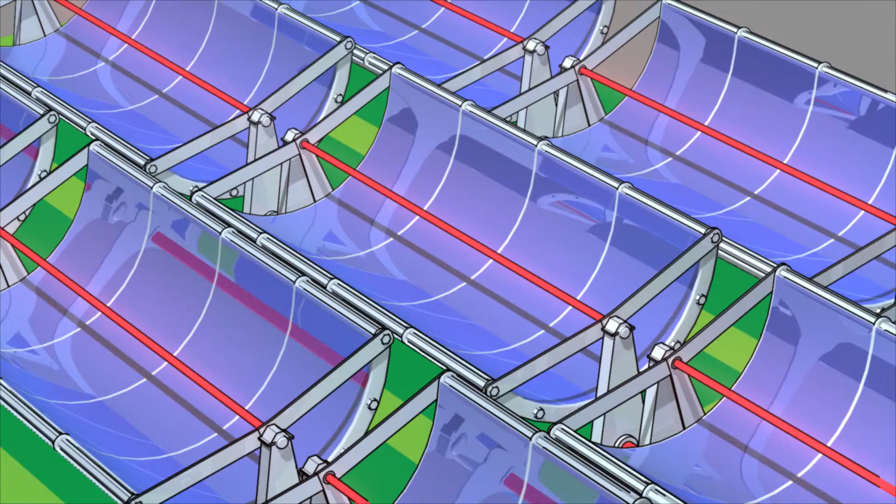Solar cells absorb sunlight and then transfer the absorbed energy to valence electrons. Energized excess valence electrons from negative layers then travel to electron-deficient positive layers, thereby producing electricity. Solar heat can be utilized to produce electricity in a practice known as concentrated solar power. Concentrated solar power systems have specially designed mirrors which focus the sun rays to generate intense heat.

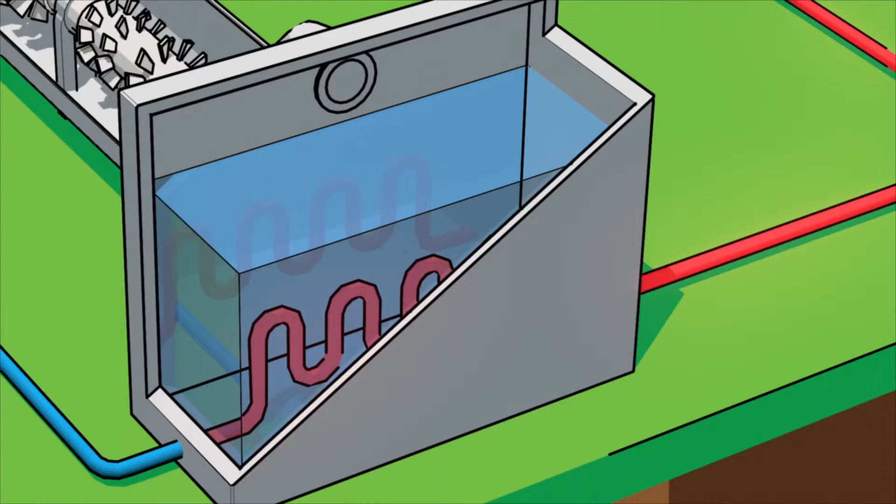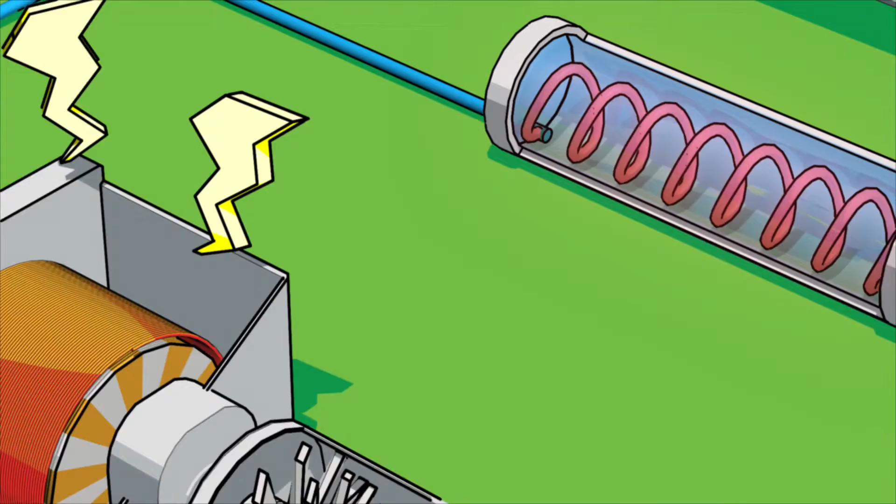Heat-storing fluids transfer the heat to either a steam turbine or mechanical device that drives an electric generator to produce electricity. Thermal storage systems store the heat generated when the sun is shining, allowing it to be used when the sun has set or is blocked by clouds. A variety of research on solar energy is being done. For example, nanotechnology is being applied in investigations of different types of solar cells.

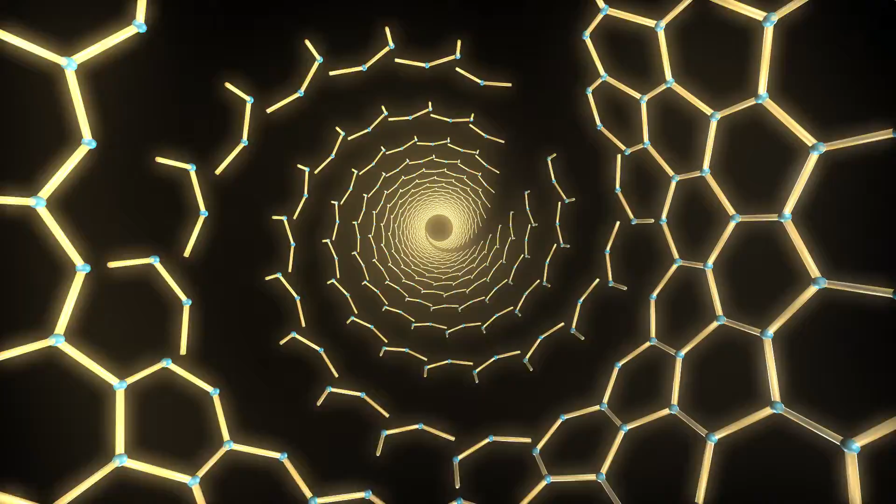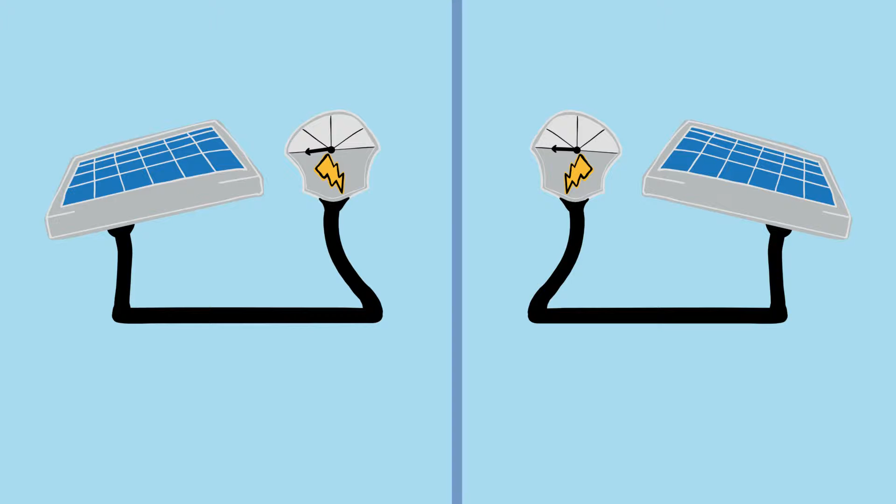Nanotechnology is a relatively new discipline involving the study of molecular structures on the order of nanometers in size. A nanometer is a unit of length equal to 1/1,000,000,000th of a meter. Due to their size and shape, such structures can possess unique properties. For example, nanometer-scaled molecular structures comprising solar cells can potentially absorb a greater amount of light across a wider wavelength and more efficiently convert it into electricity than can conventional solar cells.

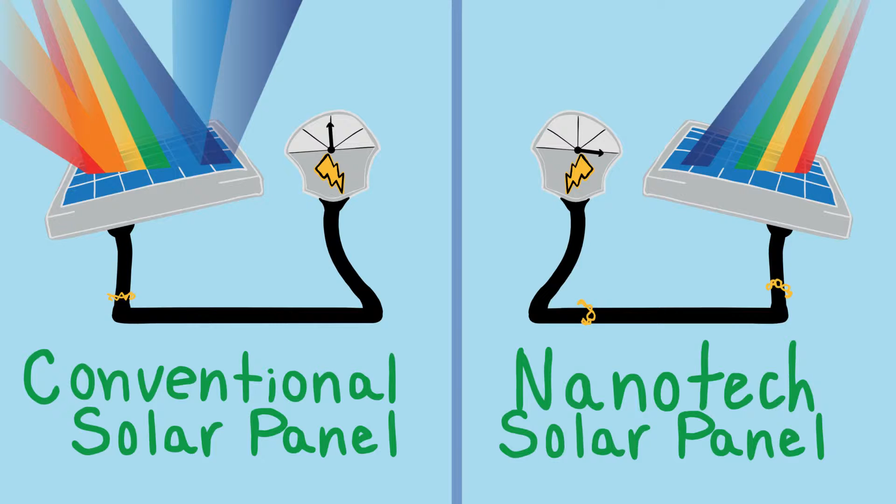A novel area of research involves using solar energy to recycle carbon dioxide by converting it into fuels. Photocatalysts are being investigated for this purpose. Catalysts are substances which speed up the rate of a chemical reaction without being consumed in that reaction. Research is being done to develop photocatalysts which facilitate conversion of carbon dioxide to various low molecular weight hydrocarbons, with sun energy driving the reaction.

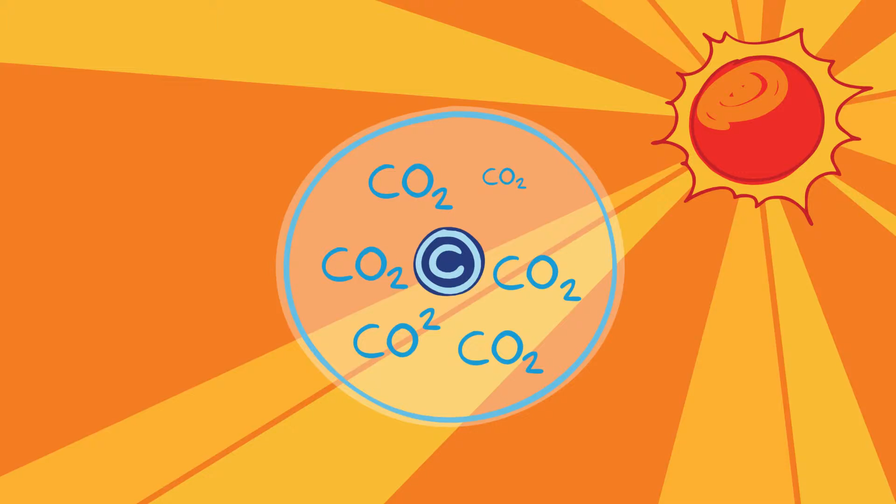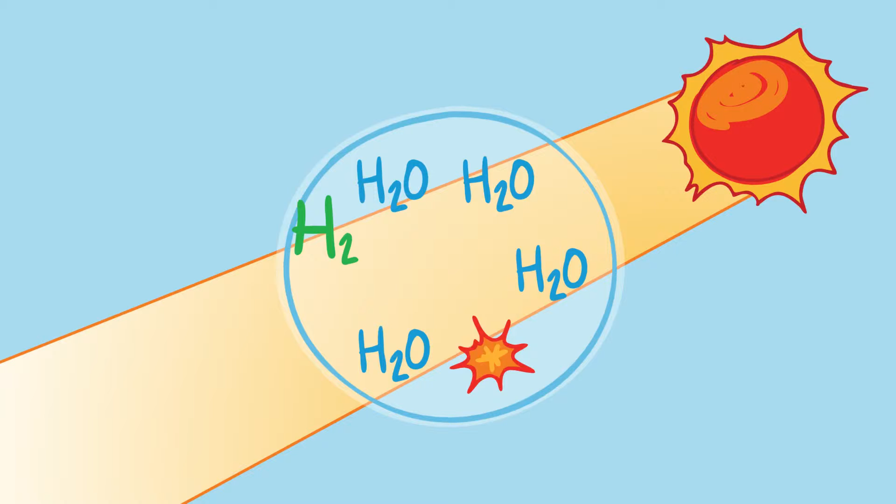Additionally, concentrated solar power technology is being developed to convert carbon dioxide to carbon monoxide and break down water to produce hydrogen. These reaction products can serve as starting materials for producing various fuels. Some of them, such as low molecular weight hydrocarbons and hydrogen, can be used directly as fuel.

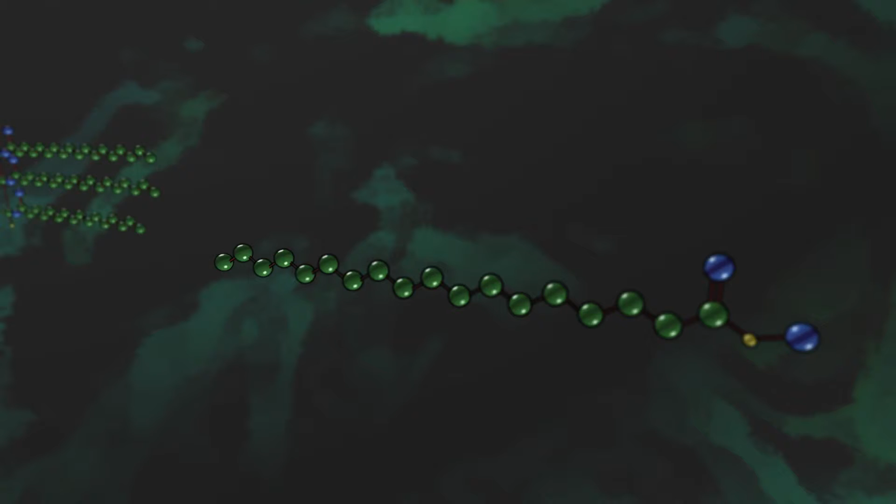Bioenergy is energy derived from organic material obtained from renewable natural sources known as biomass. Biomass includes agricultural and forestry residues, municipal solid waste, industrial waste, animal waste, and crops grown specifically for energy conversion. Biomass can be used as feedstock in producing a range of fuels known as biofuels. Various chemical and biochemical processes convert biomass to biofuels.

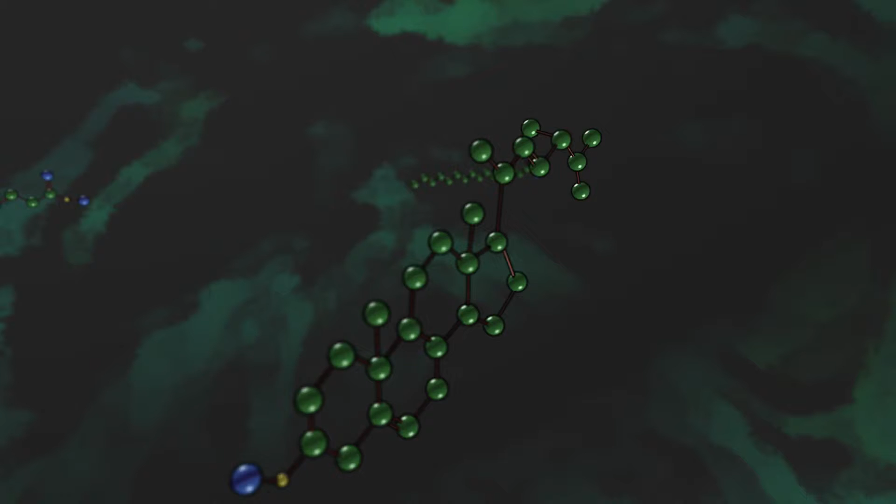For example, a series of catalyzed chemical reactions are used to deoxygenate, break down, rearrange, and isomerize lipids from algae to produce a complex mixture of branched and cyclic alkanes and aromatic hydrocarbons, which comprise jet fuel. Lipids are a class of water-insoluble natural compounds which serve various purposes in organisms, such as energy storage and as a component of cell membranes. Algae are particularly well suited as a lipid source due to their high lipid content and high growth rates.

Much progress has been made in developing biofuels. In the case of biomass-derived jet fuel, performance characteristics superior or equal to that of conventional jet fuel have been achieved. In the United States and other countries, several successful test flights of commercial and military aircraft powered by biomass-derived jet fuel have been completed.

Bioenergy research and development efforts are aimed at investigating new and further developing existing bioenergy technologies, reducing their cost and putting them into practice.

A tremendous amount of renewable energy is present in the oceans. Types of ocean energy include wave energy, tidal energy, ocean current energy, ocean thermal energy conversion, and salinity gradient energy.

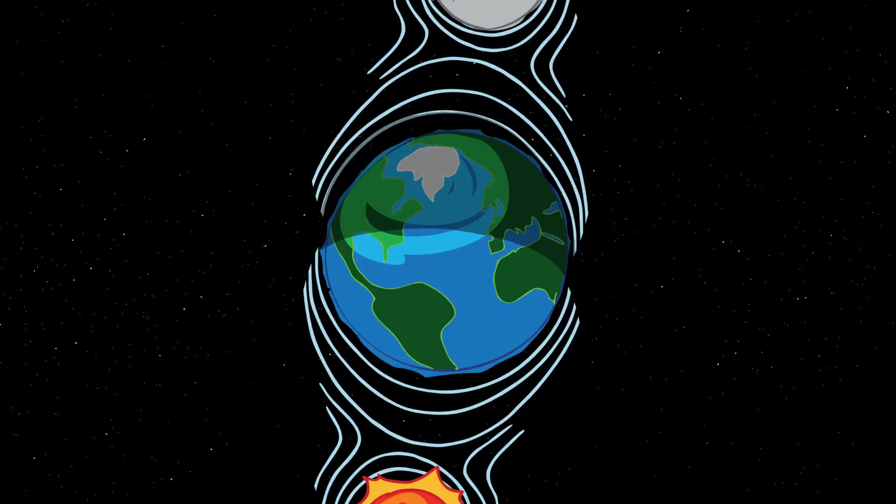Tides are produced mainly by the gravitational pull of the moon and sun. Rising and falling tides produce tidal currents which are bidirectional and reverse direction four times daily. Tides sufficiently strong for energy production occur in many places all over the world, with the highest tides in the world occurring between Nova Scotia and the state of Maine, and near Alaska.

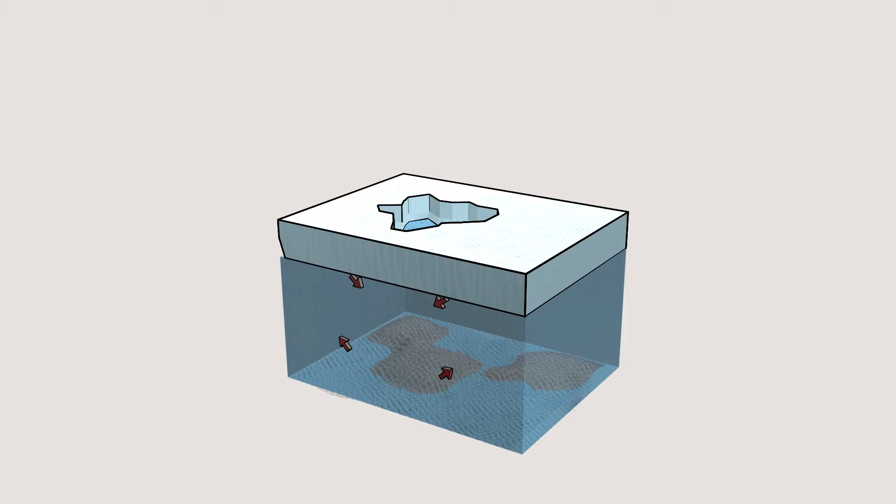When ocean water freezes in polar regions, salt is left behind in the surrounding water, causing it to become more dense and therefore to sink. Surrounding surface water then comes in to replace it, and the cycle continues. This process, as well as the action of wind, forms the basis of ocean currents.

Ocean currents move continuously in one direction and at a relatively constant rate in fixed paths, traversing oceans all over the globe. In the area of the United States, the Gulf Stream is an ocean current and travels through the Gulf of Mexico, around the tip of Florida, and up the East Coast.

Many different types of wave and tidal energy devices are in use or being developed. Some are used underwater, some at the water surface. These devices employ various different techniques to harness the kinetic and potential energy inherent in the water. Places where this type of work is being done include Nova Scotia, France, Scotland, England, China, South Korea, Portugal, Australia, Russia, and the United States.

At present, there are no commercial ocean current energy facilities in operation. However, various techniques to harness ocean current energy are being investigated.

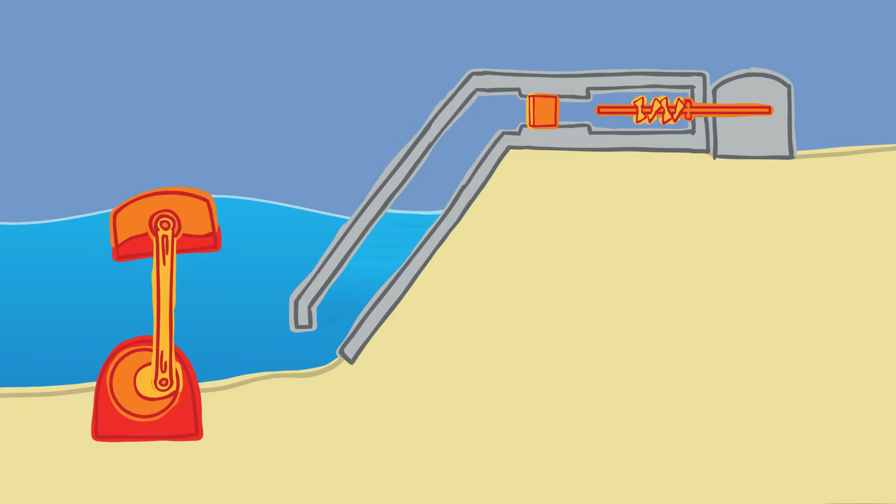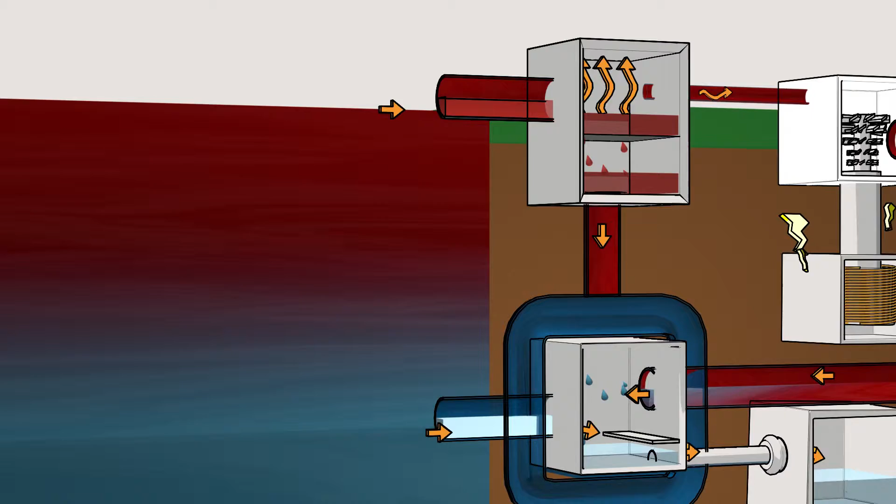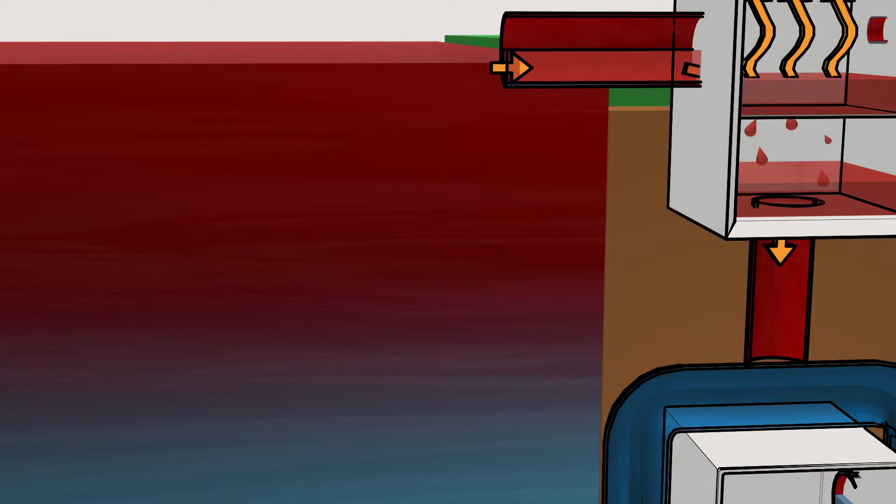Ocean thermal energy conversion, also known as OTEC, takes advantage of the temperature difference between colder, deep ocean water and warmer surface water in tropical coastal regions. One type of OTEC system employs a process whereby warm surface water subjected to a low-pressure environment is converted to steam. The steam drives a turbine connected to an electrical generator to produce electricity, and cold water pumped from the deep condenses the steam.

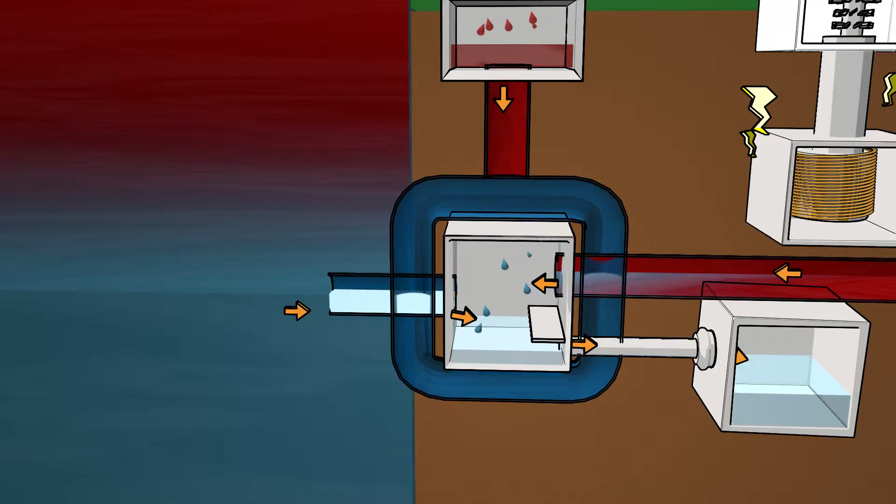Current research on OTEC is aimed at improving the technology and reducing cost.

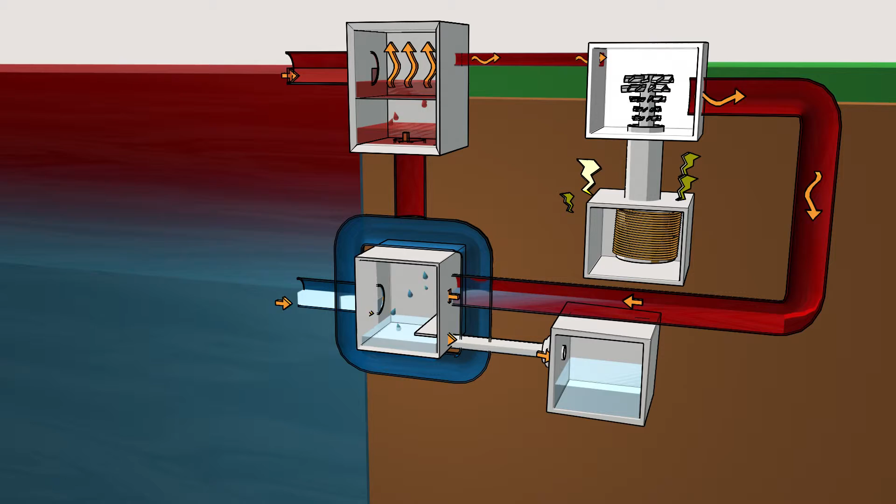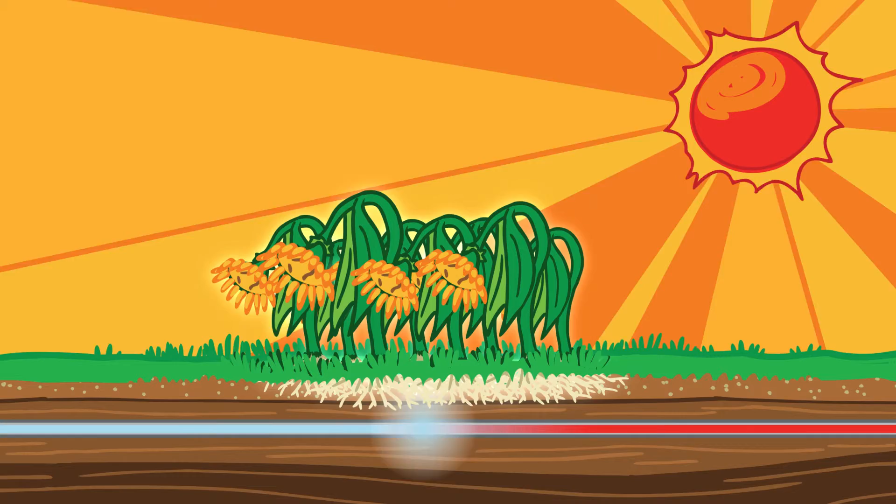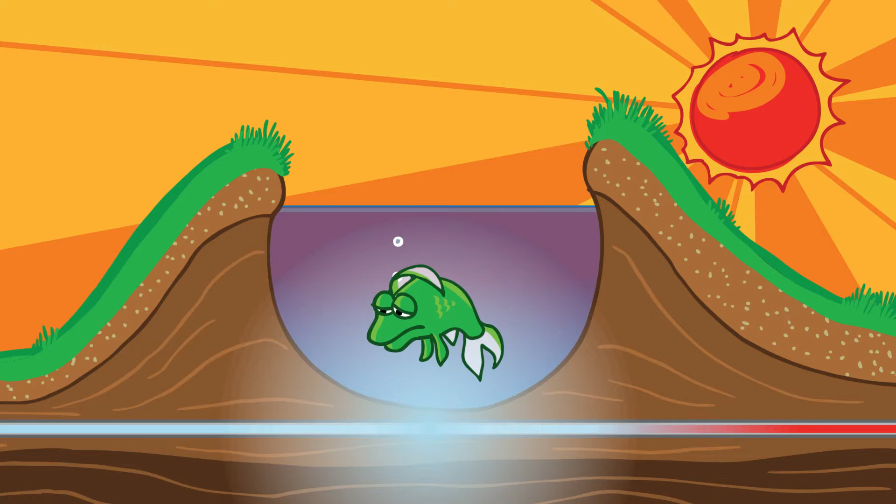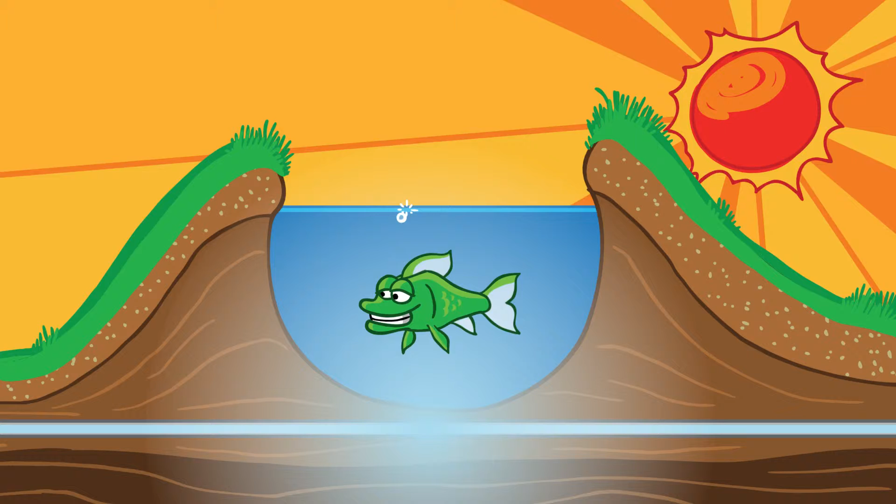OTEC offers interesting side benefits. Cold water from OTEC operations can be used for refrigeration or for air conditioning in buildings. It can also be used to chill soil, allowing temperate climate plants to grow in warmer climates. It can also allow farm production of aquatic species not otherwise amenable to growing in warm climates, including salmon, trout, lobster, clams, oysters, and commercially valuable algae. Some OTEC systems produce desalinated water from the condensed steam.

Places in the world with existing or planned OTEC research facilities include Hawaii, Florida, the Republic of the Marshall Islands, and the Republic of Nauru.

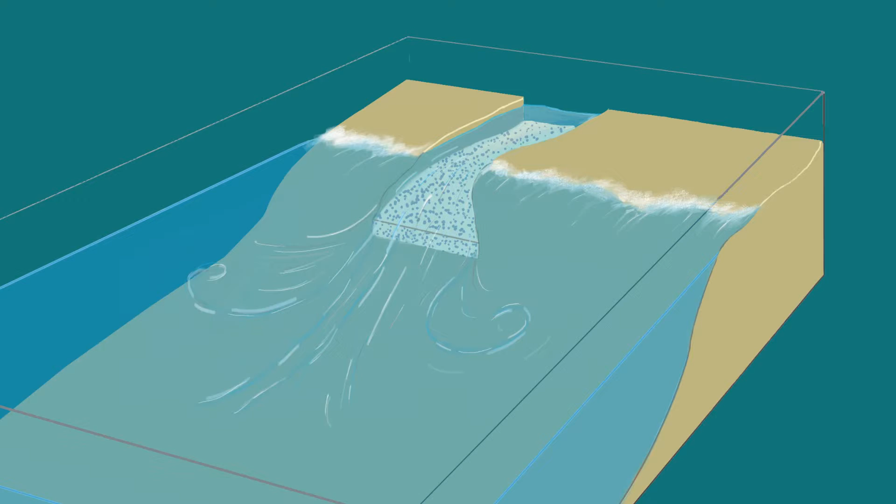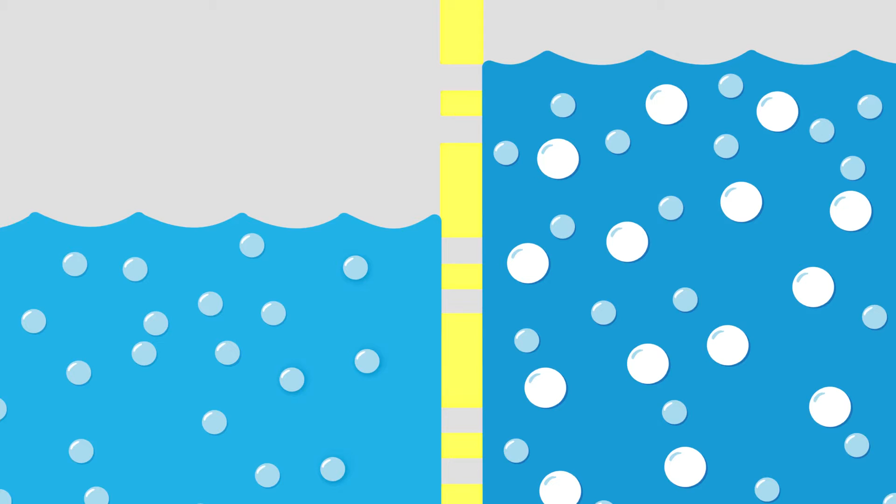Salinity gradient energy is possible when fresh water joins salt water, as is the case in places where a river flows out into the sea. Due to their differing solute concentrations, salt water and fresh water differ in water pressure. When such solutions are placed on either side of a membrane permeable to water, but not to ions, water will pass through to the higher solute side to equalize the pressure. This is known as osmosis.

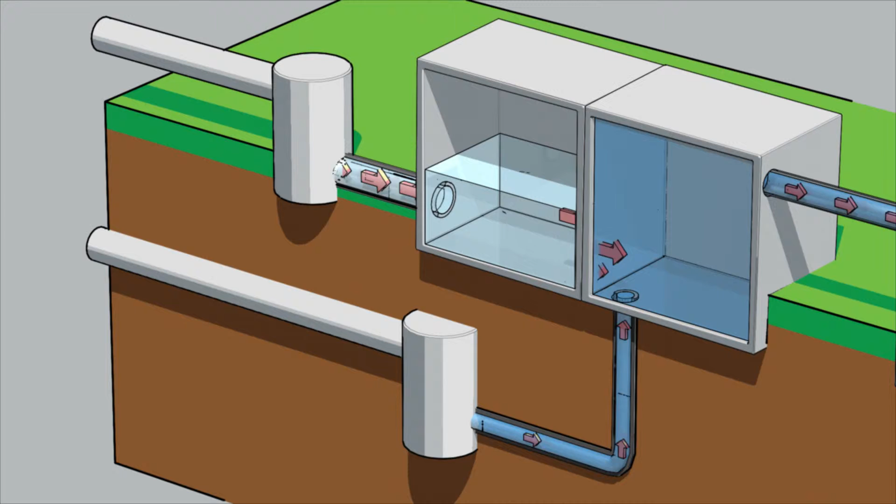A facility in Norway derives energy from the increased water elevation on the saltwater side of such a system. The water is released and used to turn a turbine.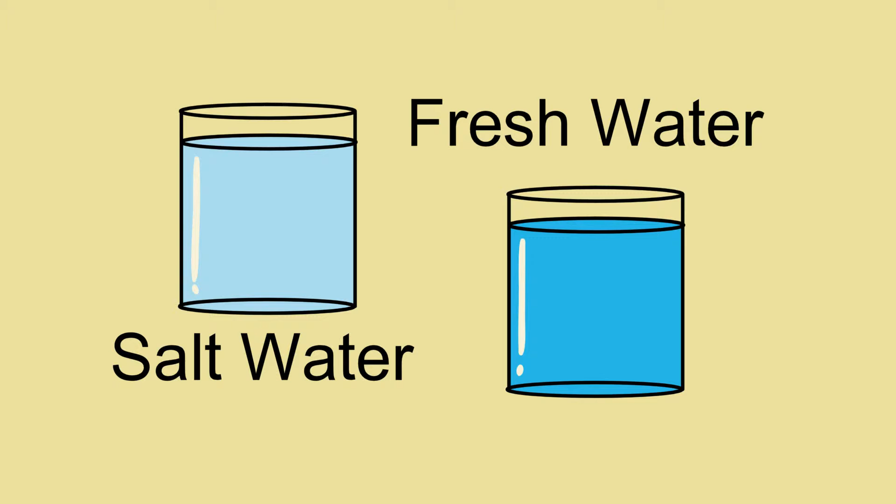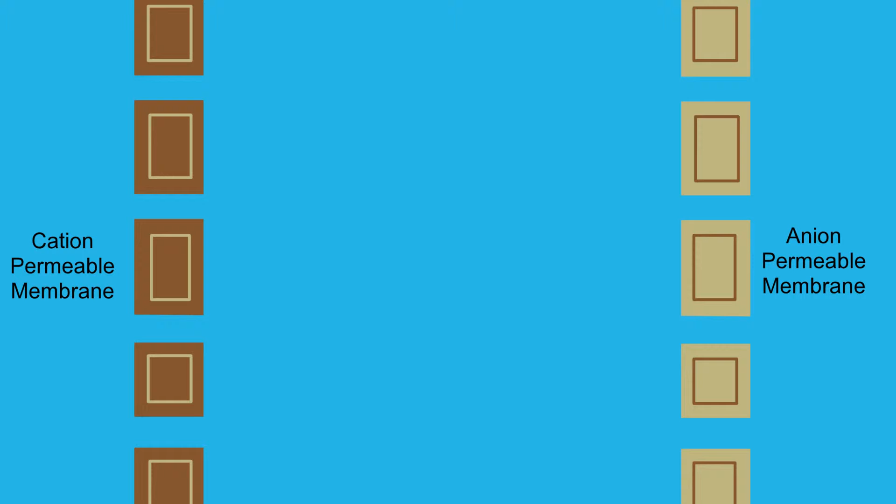Energy can also be derived from ion concentration differences between salt water and fresh water in a process known as reverse electrodialysis. This process employs membranes selectively permeable only to anions or cations. Salt water in a container is separated from fresh water by a cation permeable membrane on one side and an anion permeable membrane on the other.

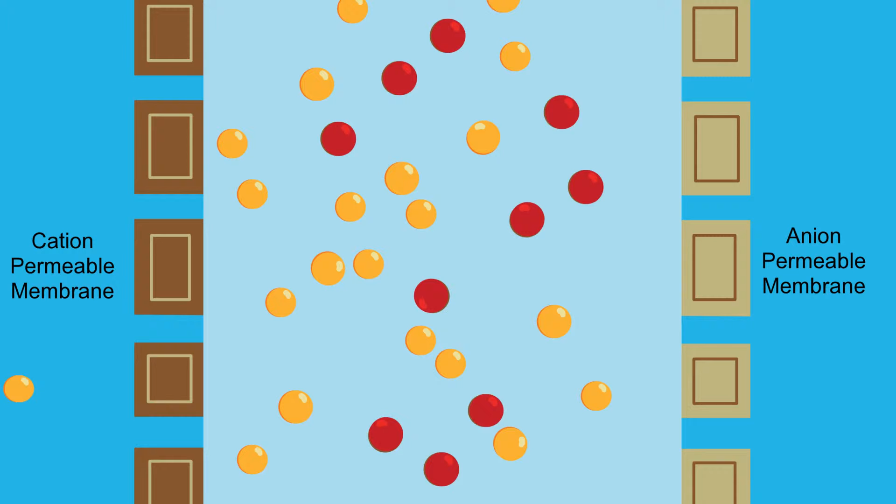When salt water moves through the container, sodium ions pass through the cation permeable membrane, and chloride ions pass through the anion permeable membrane. The resulting charge separation produces a voltage, which can be converted to electrical current. A facility in the Netherlands produces electricity using this process.

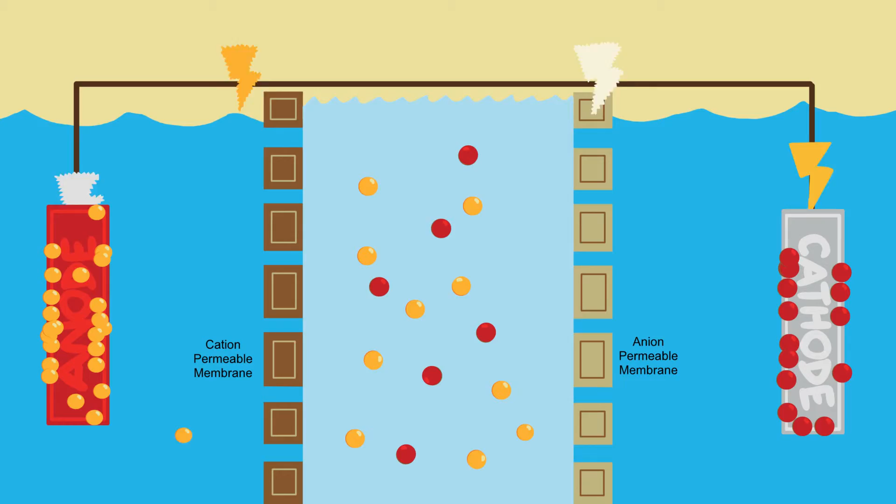Geothermal energy is the heat present in the Earth's crust produced from radioactive decay of materials in the Earth's core. This heat is stored in underground reservoirs of steam, hot water, hot dry rock, and magma. Magma is partially or completely molten rock.

Geothermal energy can be used in different ways depending on the temperature of the geothermal resource. Heat from hot water can be used for such things as heating homes and buildings, commercial greenhouse operations, commercial laundry operations.

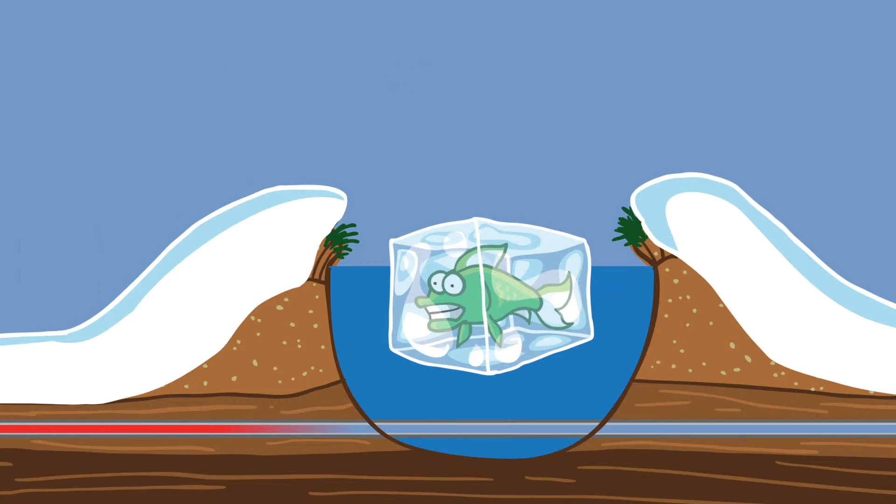Also fish farming, dehydration and food processing, milk pasteurizing, and heating swimming pools and spas in resorts. Some localities have placed hot water pipes under roads and sidewalks to melt snow.

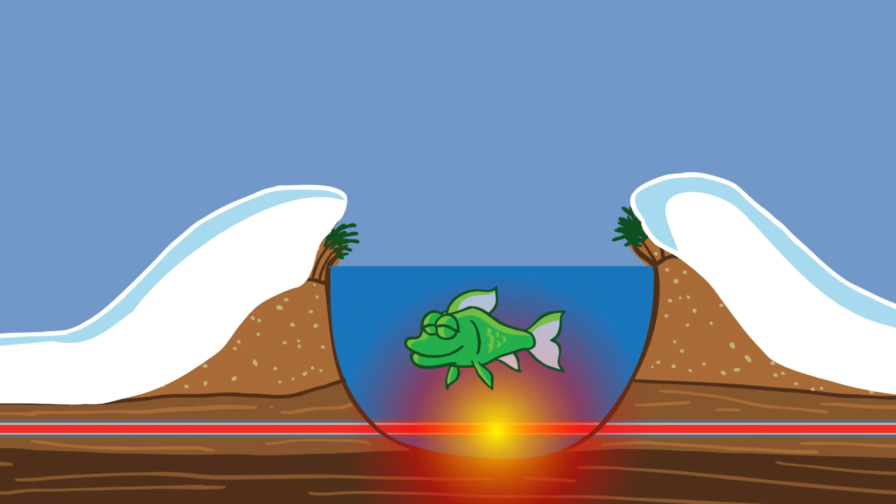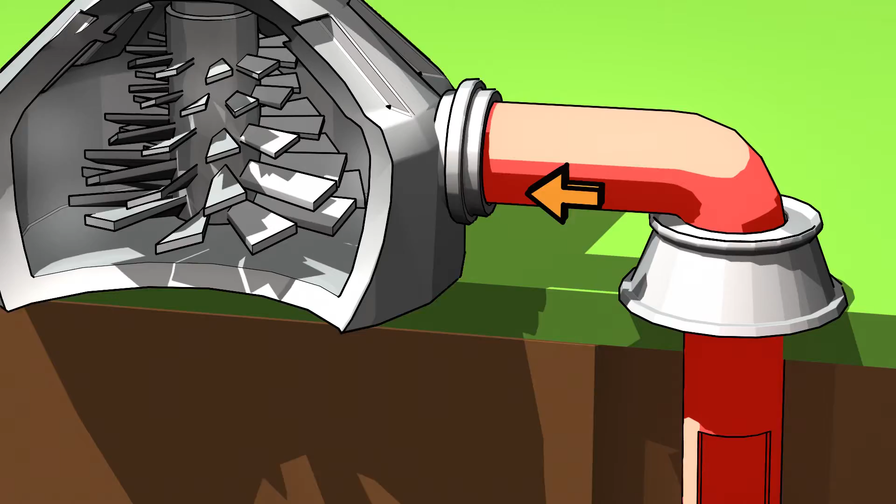Hot water or steam from higher temperature sources is used for generating electricity via steam turbines. Cold water can be pumped into hot, dry rock via a well to generate hot water or steam. Work is being done to access heat from magma as a geothermal source.

Because of its close proximity to intense volcanic activity, Iceland is able to generate a significant amount of its electricity from geothermal sources.

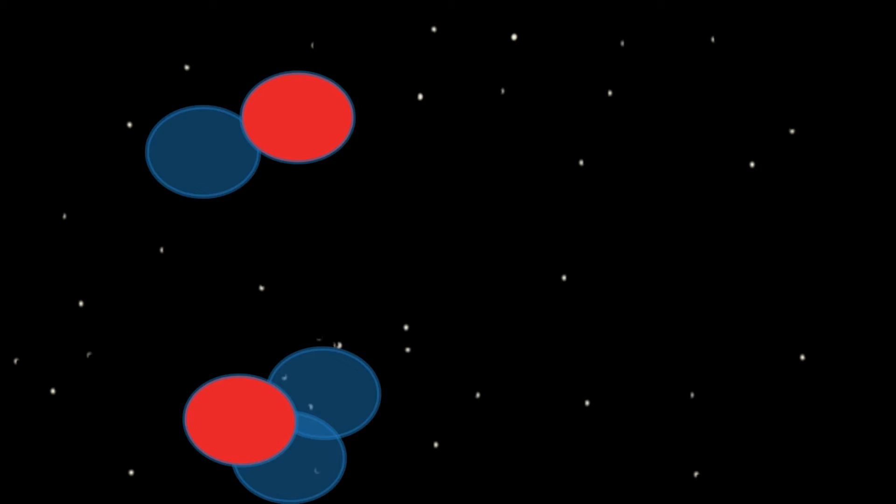Fusion can potentially produce tremendous amounts of energy, but has not yet been successfully put into practice. Fusion is a reaction which releases energy from nuclei of low atomic weight elements combined. Under the right set of conditions, collisions of atomic nuclei are sufficiently energetic to overcome their electrostatic repulsion, allowing them to fuse with one another.

The amount of energy released is determined from Einstein's equation E equals mc squared, where m is the decrease in mass between product and reactant nuclei, and c is the speed of light.

Many different fusion reactions are possible. The heat and light from the sun is produced from fusion of hydrogen nuclei in the core of the sun.

Fusion of deuterium and tritium is being investigated as a potential renewable energy source. Deuterium and tritium are isotopes of hydrogen. When deuterium and tritium nuclei fuse, energy is imparted to a released neutron, causing it to travel at high speed.

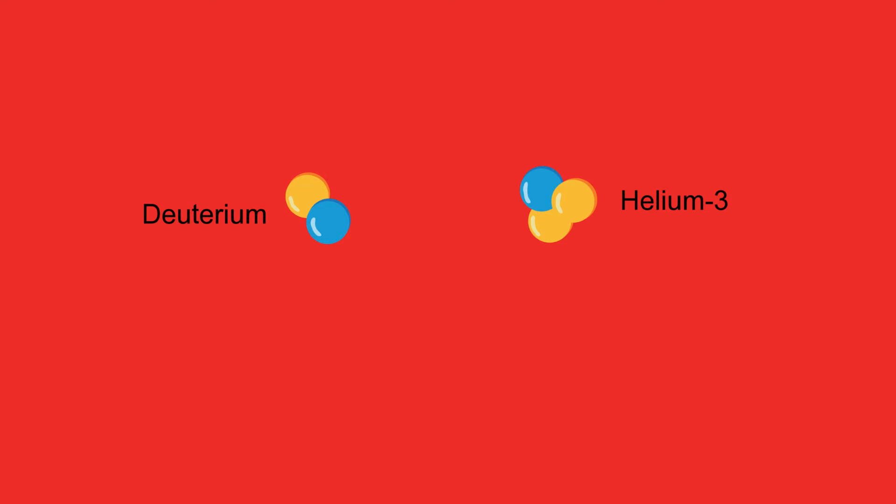Fusion of deuterium and helium-3, which releases high-energy protons, is also being investigated for this purpose. Helium-3 is an isotope of helium.

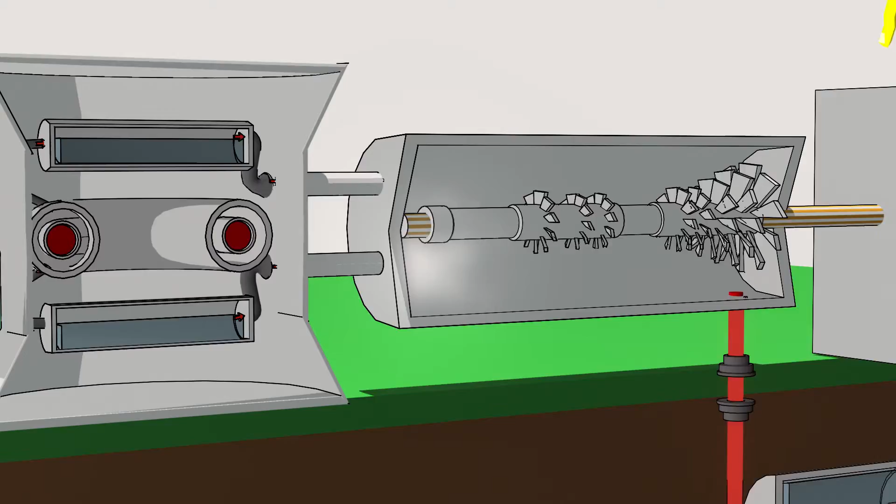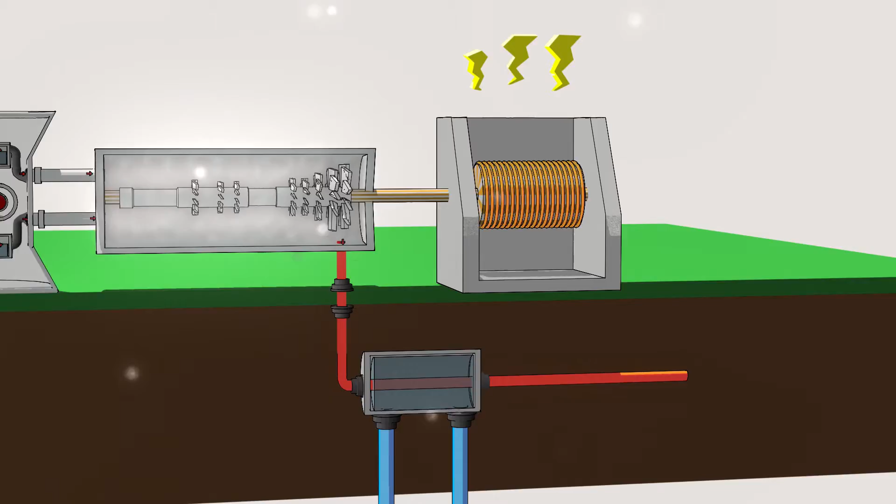Useful energy is expected to be obtained from released neutrons when the neutrons strike a surface, thus producing heat. The heat can be used to produce steam, which in turn can drive a turbine connected to an electric generator, thereby producing electricity. Energy from released protons can be captured using electric or magnetic fields or solid-state electronic devices and then directly converted to electricity.

Fusion research is being conducted in places all over the world. An international research facility is being built in France. Research at this facility will be done in collaboration between the United States, Russia, the European Union, China, India, Japan, and South Korea. Research at this facility is expected to begin in year 2018.

As we have seen, much interesting work is being done on alternative energy. With a little imagination, all sorts of creative ideas can be thought of for improving ways to use alternative energy or for finding new sources of it. Who knows? Yours may be the next big idea.

Ensuring good quality, sustainable living conditions for future generations presents many challenges and will require our continued efforts. Alternative energy offers great potential for achieving this goal. There are many opportunities for research, development, and implementation of alternative energy technologies. Maybe you will consider a career as a scientist or engineer and help to achieve our common goal of harnessing the power of renewable energy sources.